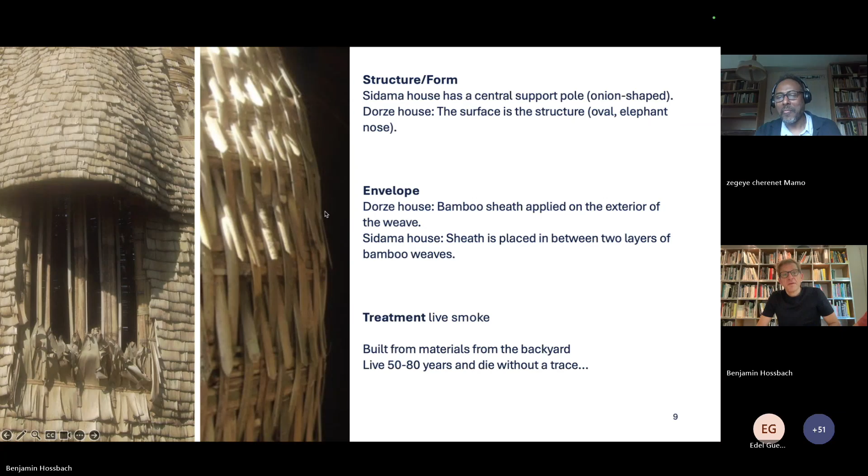There's some nice sound in the back.

Which is on the one hand super detailed and a very site-specific answer to a need. On the other hand, you've reached an almost philosophical dimension of construction, which is exciting. And maybe in this extreme range lies the answer to one of our guests who's asking what purpose House of No Waste serves.

So I understand the question. Is there a given use of the House of No Waste that we're looking for in this competition, or is it more a general attitude that we're looking for? And again, it is written somewhere in the competition brief that we are not defining a specific use like a kindergarten or school or a house for living. It's more the house in the overarching sense that we're looking for.

And maybe, Zegeye, you can dream or reflect also on that question of what can you imagine a young person from a city, wherever on our planet, can learn from the project that you've shown to us?

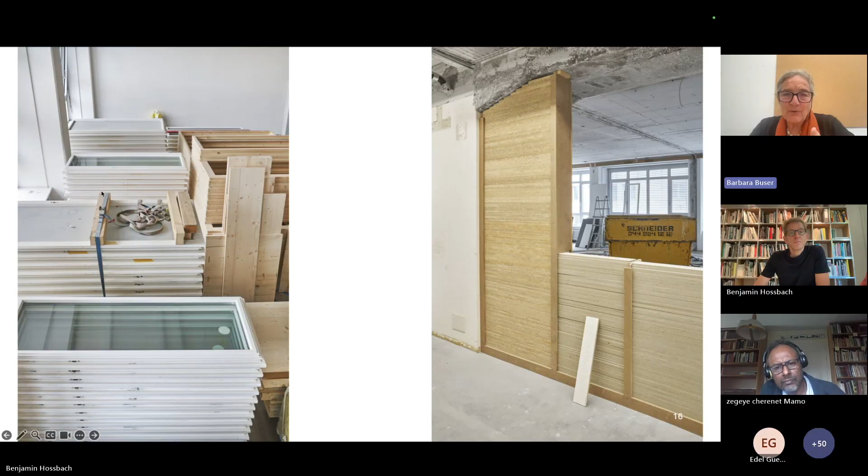You will see how. We took down all the ceiling, cut it into pieces, and built the walls with it, shown on the right side. That's how it looks. The doors are the same, but we had to fill the openings, and we did it, as I said, with these cut-offs from the ceiling.

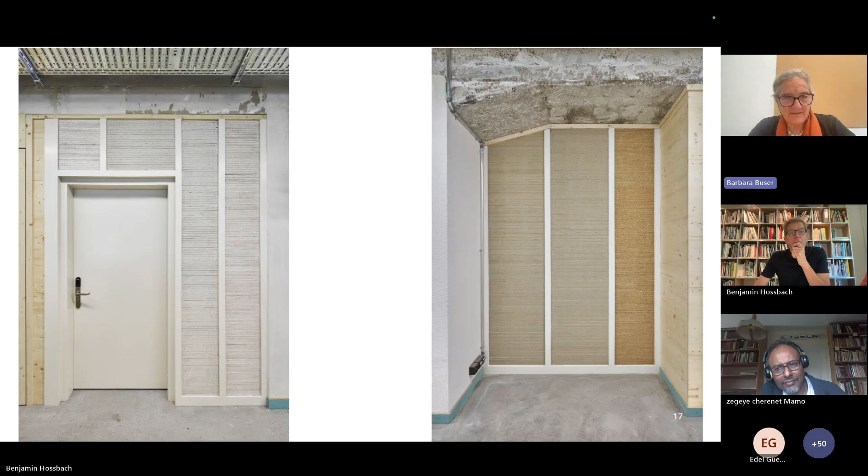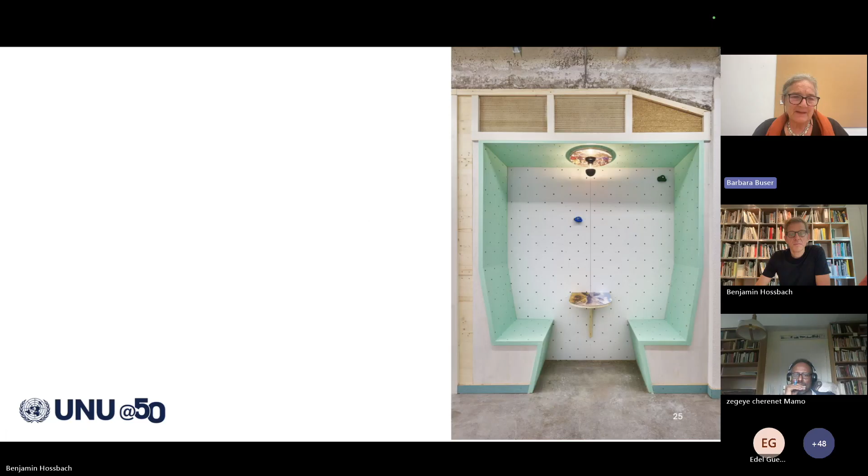Yeah, so that's one example of our work. We have been about 60 architects in our practice for 30 years. And for 30 years, we have been trying to reuse as much as we can, but it always depends on the owner of the work. If he wants it and agrees, then you can do a lot of things. If they say no, we really want the normal and we don't want to make experiments, then it's not our client. Thank you for listening.

We don't hear you. Yeah, thank you, Barbara, for your impressive presentation. Maybe I'll allow a question from myself.

I mean, you've been a pioneer for so many years now in this attitude of recycling material, and the project that you showed us is truly a radical and almost complete answer. I'm sorry, it's not recycling, please, it's reuse. Because recycling means destroying the form and melting it down again, using a lot of energy. Reuse is keeping the form, reusing it in a different way.

Sorry for that. Oh, that's very important, to put more light on the question we're asking here, that it's not such a simple issue we're talking about. If you don't think a lot about this question, it may seem like a simple answer like I just gave, just recycling things, like what we all know from our garbage bins.

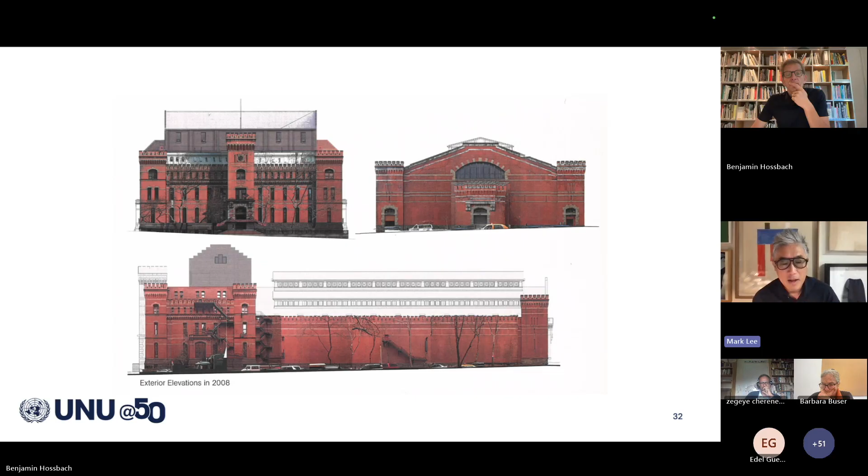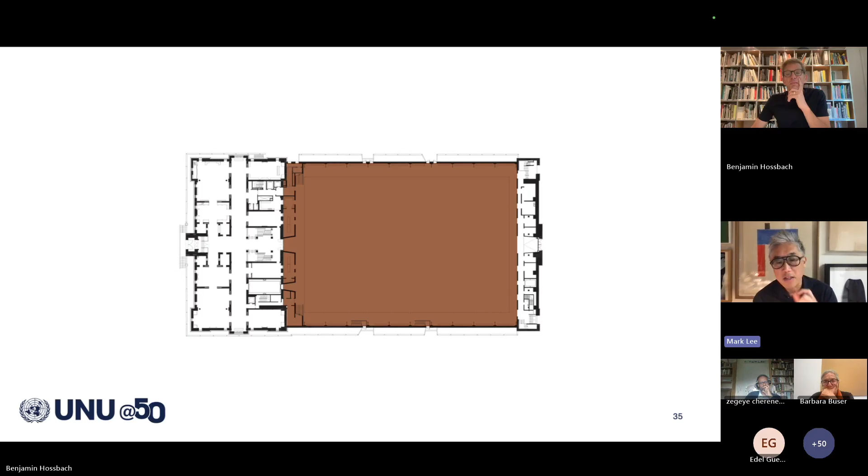Next, please. Here you see the plan. The front is this so-called head house, the palazzo type, and the second is this drill hall, the big shed in the back.

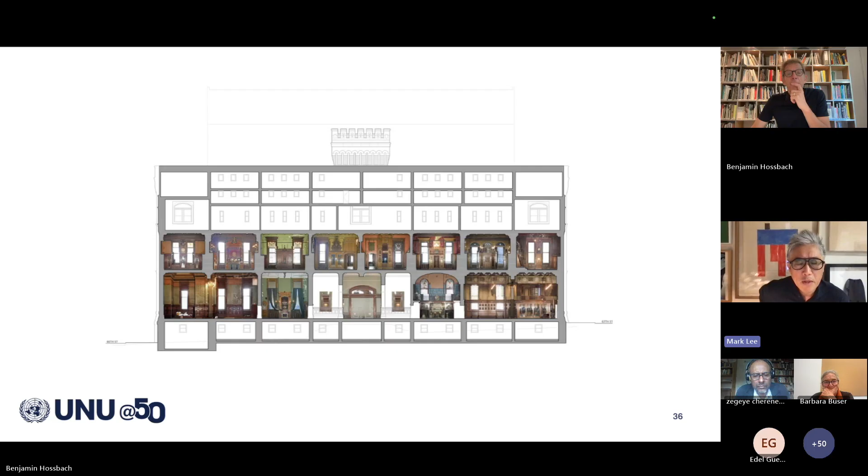Next, please. Over time it has been a major social center. Although it started off serving this militia group, it became a very public building that hosted dances and shows, playing a very important role on Park Avenue.

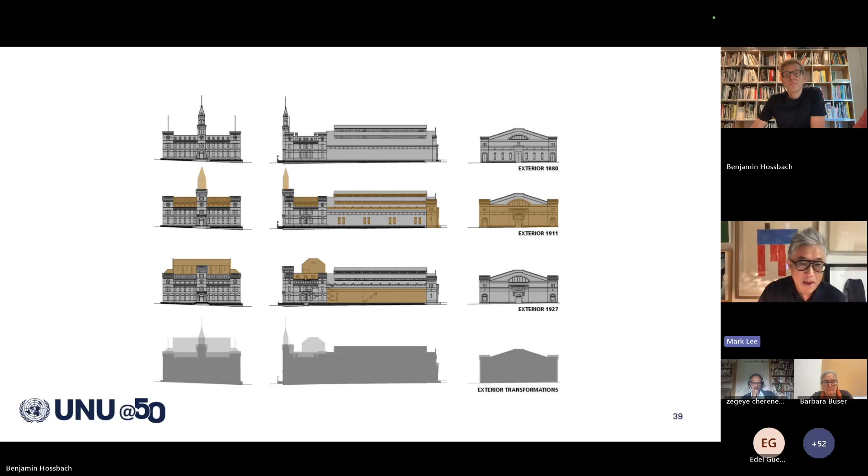Next, please. Now over time, you can see all the different things that have been taken away or added, like a 5th floor, or taking away the tower. This is only at the larger scale of the massing, but a lot of changes have happened in the interior.

Next, please. Some of these historical images show how the hall is occupied. Next, please. All these social events, for the military group.

Next, please. So when HÖW were commissioned, the building had really fallen into decay, and the city had managed to turn it into a public building. A lot of the historical rooms were quite raw and showed the historical weight of the structure. Also, in the big hall, you see on the right-hand side, when HÖW visited, they still had all the wires that were set up by the emergency units during the 9/11 disaster.

Next, please. So I think HÖW decided on something radical for them: rather than a very typical adaptive reuse for this type of building, which is not very much a monument, they decided to really treat it as a monument and preserve it for the future.

Next, please. So this is a quote from Jacques Herzog, who said this is a conservative approach, but to do that is actually quite radical, because by doing this we can really preserve the status and then adapt it, rather than adapting it for a special use.

So I'm going to go through the project very quickly. Next, please. So the first part is these two different types, the head house and then the drill hall.

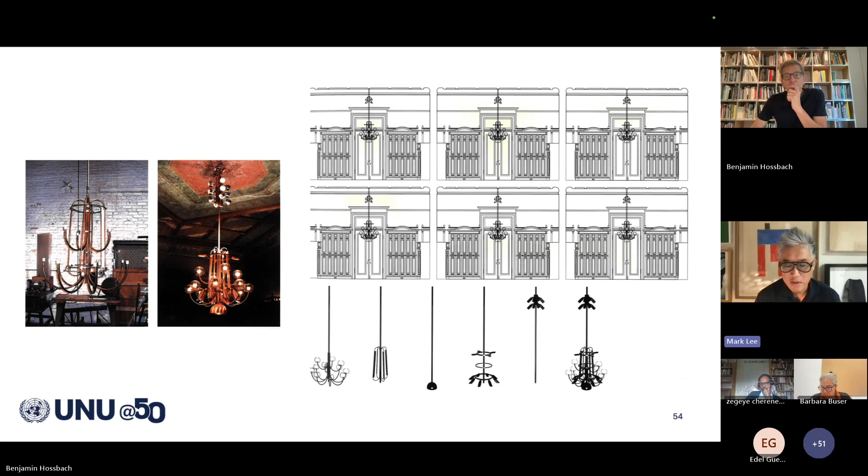This is the finished version of that room. I'd like to show you one more room in this building - another similar type of space.

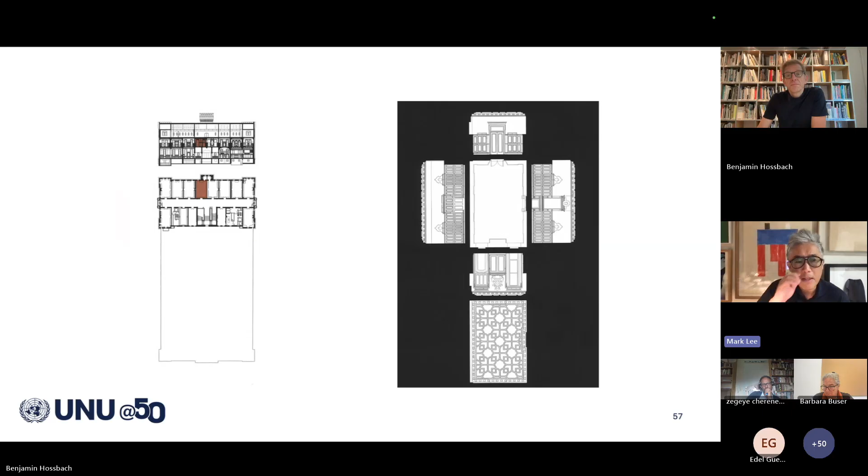The ceiling had been destroyed, some artifacts like the chandelier were destroyed, and a lot of additions had been added on over the years. The architects had a lot of discussion about where to preserve certain aspects, since there are also layers of history over time. But they decided at one point to go back to the 1880 interior.

One of the issues involved mock-ups of the new LED lighting needed for public use, and how they could echo some of the motifs of the original building. In the end, they decided to contrast it with a very different light. This is the finished room, leaving the ceiling exposed rather than replicating it, but introducing a very industrial light that works for the performances and events needed in a public building.

The circulation is really about turning it into a public street equipped with the technical infrastructure for cultural events.

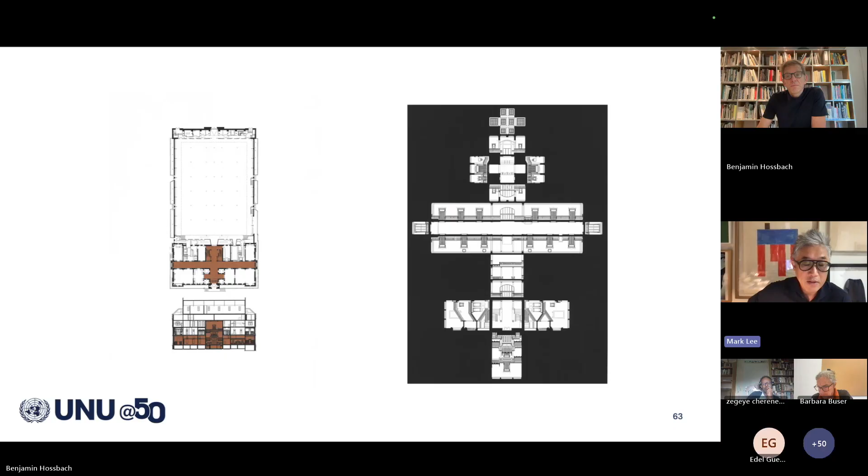Small details, like adding a copper handrail to bring the existing grand stair up to code. Here you see it being used for a public dinner. The before and after shows how the ceiling was redone, along with this little copper handrail that makes it up to code.

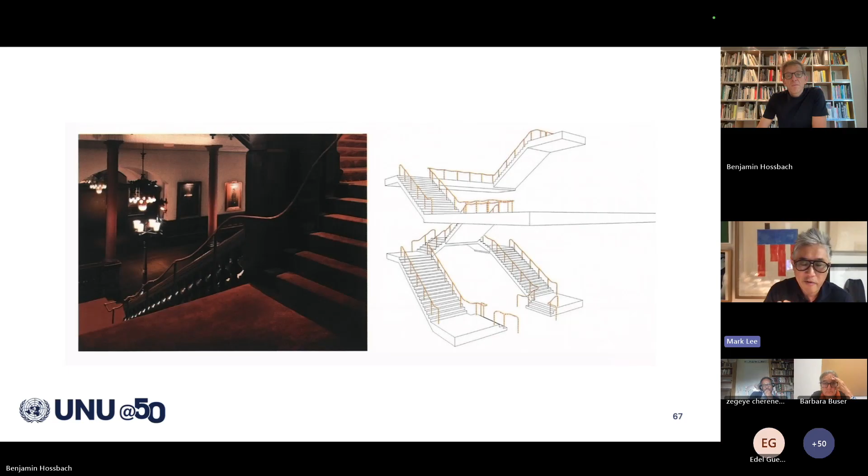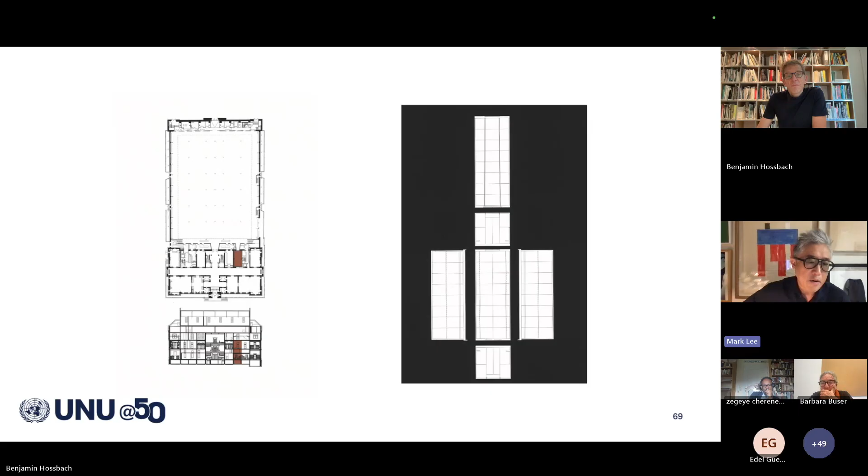Most of the so-called new interventions in this building that weren't there before were actually done in copper. Perhaps one of the most radical things is turning one room into an elevator. The entire room becomes not only a service elevator, but also services both the head house and the drill hall. This historical door would open, and the entire room is an elevator with a copper finish - the so-called moving copper room.

Here you see the interior of the elevator. And then, finally, the drill hall.

The drill hall restoration is really about restoring its industrial character and structural clarity. A lot of it is about incorporating new lighting, new ventilation, and event infrastructure.

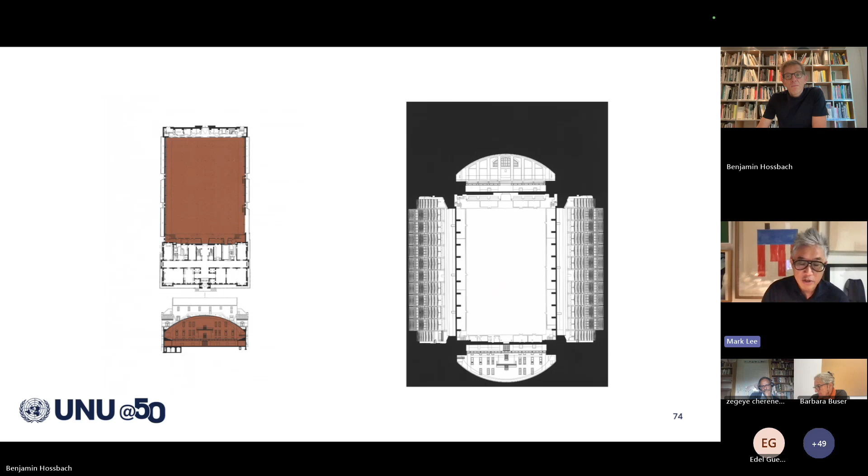It's really an issue of erasing a lot of the things that have been added on over time around the perimeter, or integrating infrastructure and lighting between the joists and the trusses.

Here are some full-scale mock-ups of new lighting in the existing structure. This is the finished product, and these are some of the events it has hosted. This is the last image.

One of the reasons I chose this building, besides how sensitively the architects restored it, is that for me it represents two very adaptable types. As an architect, I work a lot with art institutions or public institutions, and oftentimes we find historically that the most adaptable types are either the palazzo or the industrial shed.

I think examples of these two types coming together as one could be seen in a lot of 19th century train stations, where you have the so-called palazzo being the waiting hall that faces the city, and then the industrial shed being the train hall in the back. This type is, for me, very much this train station type, where both of these types with different degrees of flexibility become one building that has been restored.